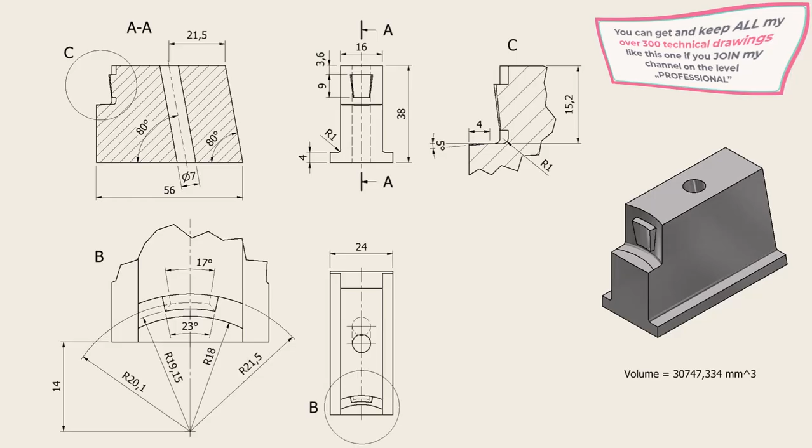Hi my friends, today we model this part. It seems to be simple, but it is not simple at all. These faces are sloped and curved.

The drawing is here and the name is spin piece. You have two details, B and C, to understand each feature and dimension.

We start by creating this contour with an extrude of 56. You see dimensions 38, 16, 4 and 24.

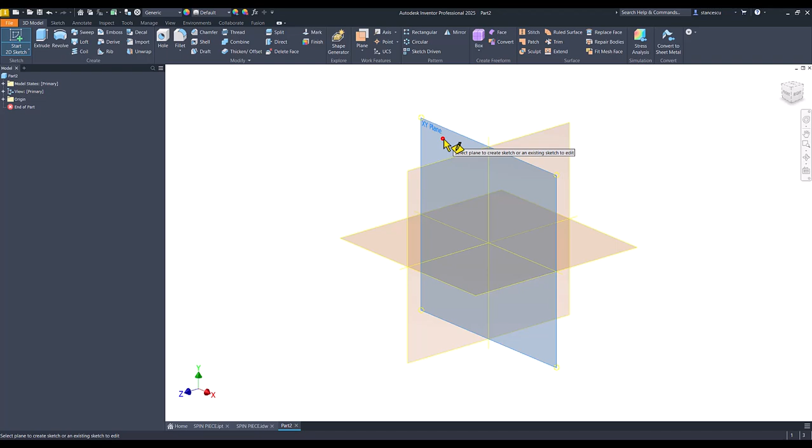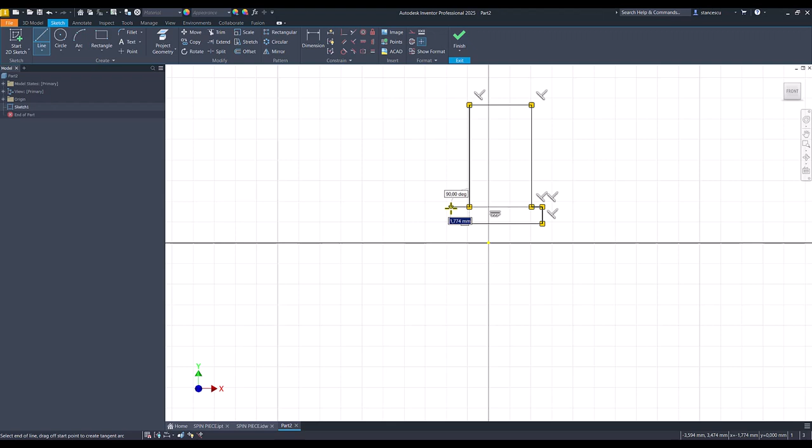Let's start. Standard millimeters IPT, new sketch, XY plane, and we draw lines. I go at this level, then here, and close, but vertical, of course, this line. We place the midpoint of the base

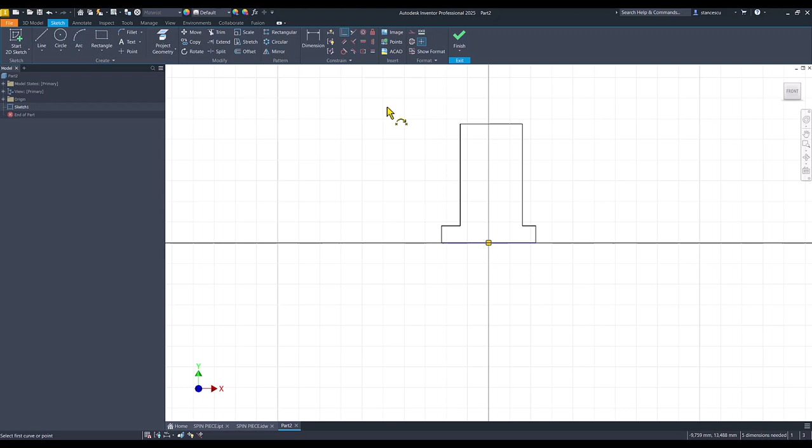on the center point and we apply equal to these two small lines. Why? Because we want to have symmetry here without any other entities placed here.

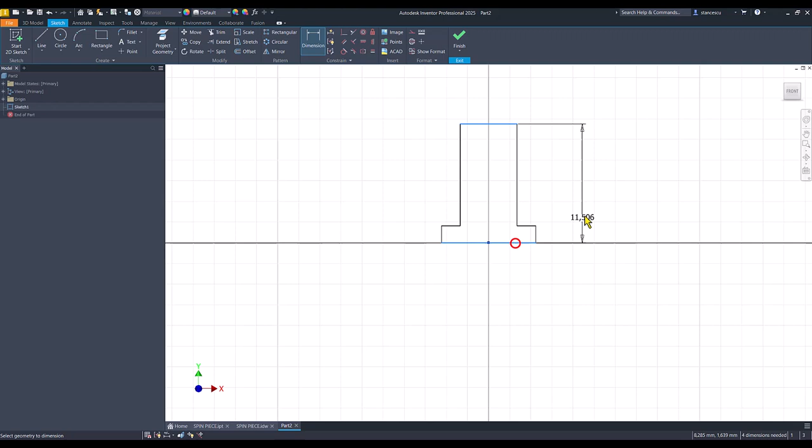Dimension, this is 38. Everything is scaled. This is 16, 24, and the last dimension is 4 millimeters here.

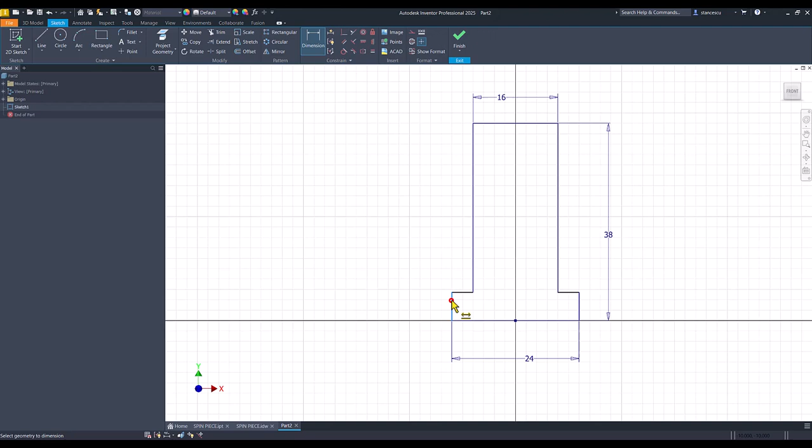Finish sketch, extrude to the other direction of 56.

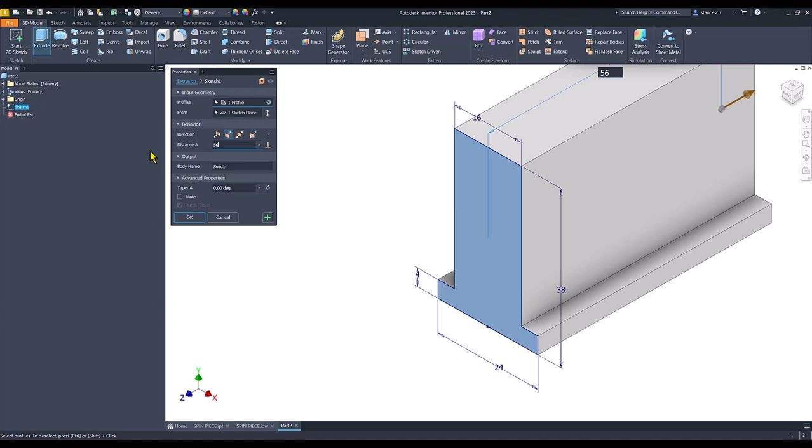Then we cut this end of the part 80 degrees from 56.

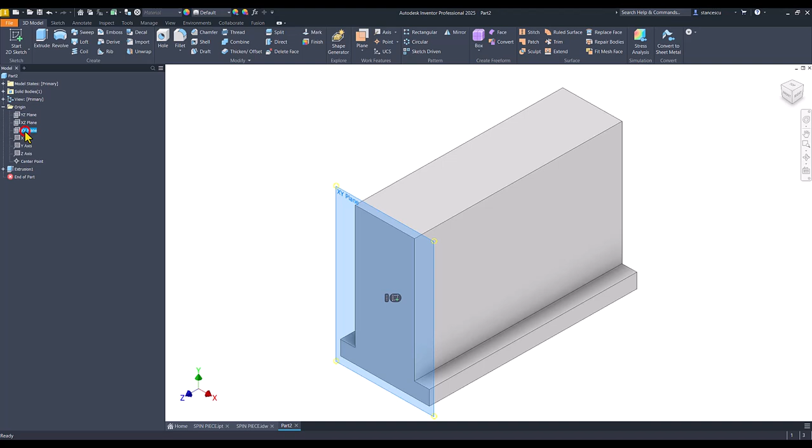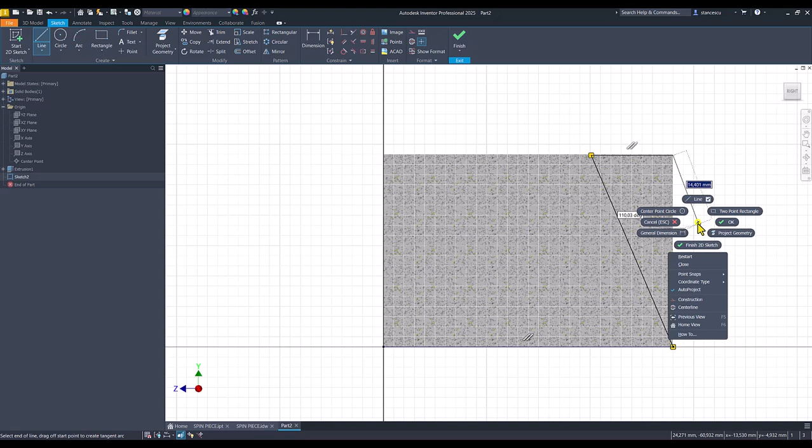We select the sketch XY, not XY, YZ, and F7. We draw a line from this corner up here, then to the end, then close. The angle is 80.

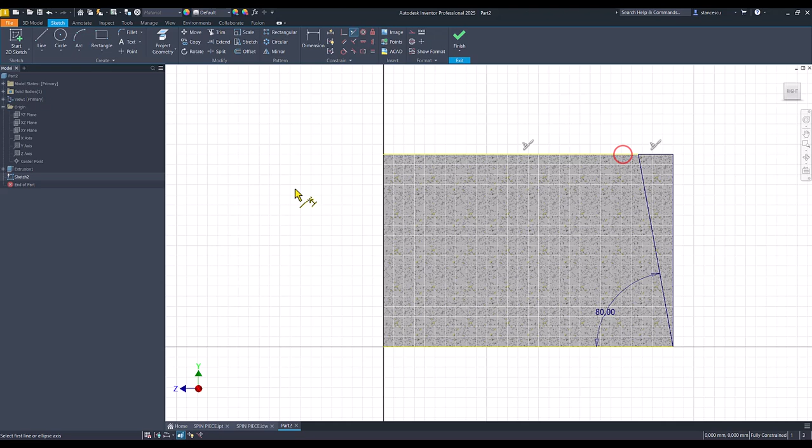I must project this line and make collinear these two lines. Finish sketch, extrude, symmetrical, cut all the way.

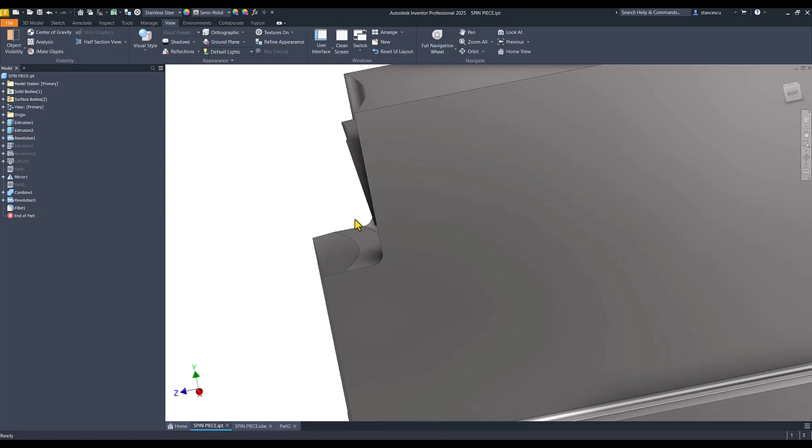Then we apply this cut, you see, around here and with another face here. Dimensions are here, you see, 21 and 18 are the important dimensions.

The center of these arcs is at 14. Dimensions, radius 18, radius 21.5. This is 4 millimeters and this is 5 degrees. Let's apply this.

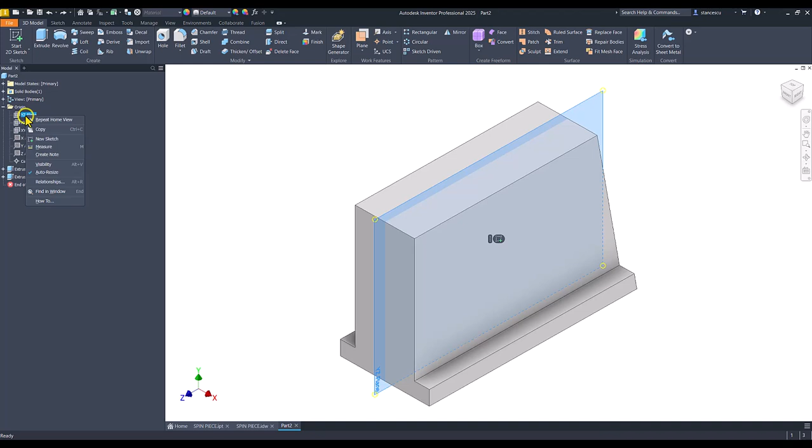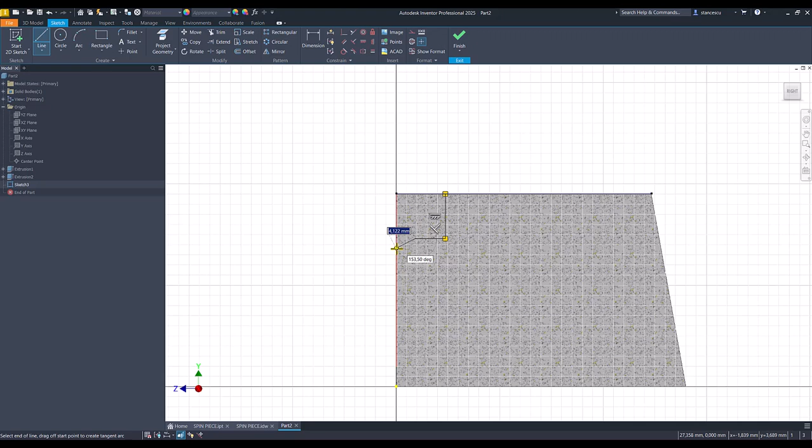We use the plane YZ again for a new sketch. F7, and we focus on this corner. Line, down, left, and sloped. We connect these 2 points and also this.

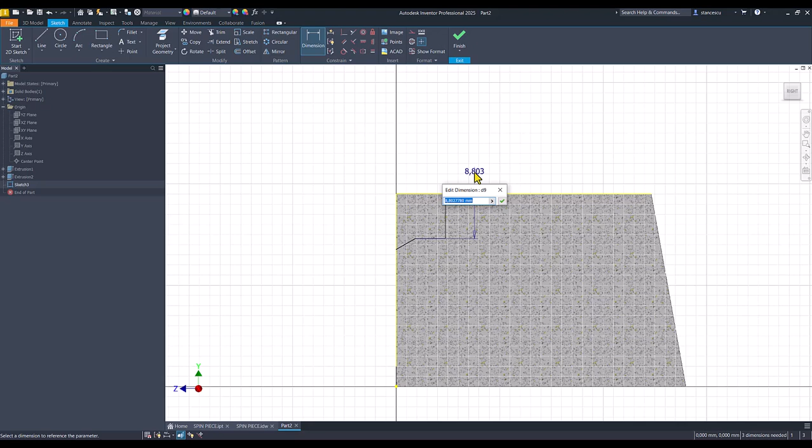We place vertical dimensions. This is 15.2. The angle must be oriented down 5 degrees.

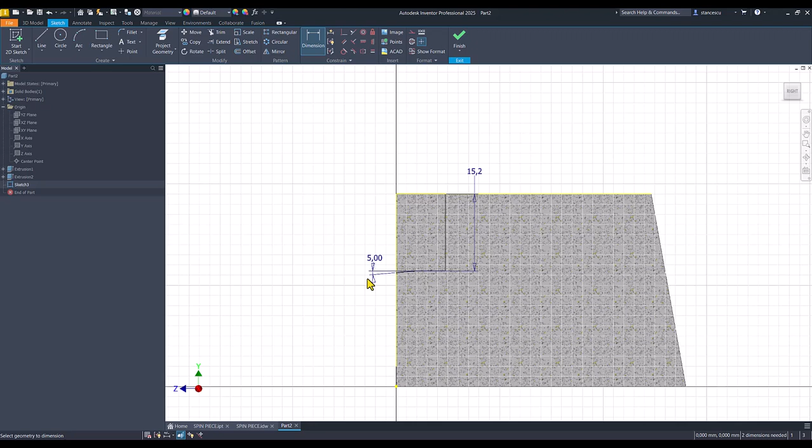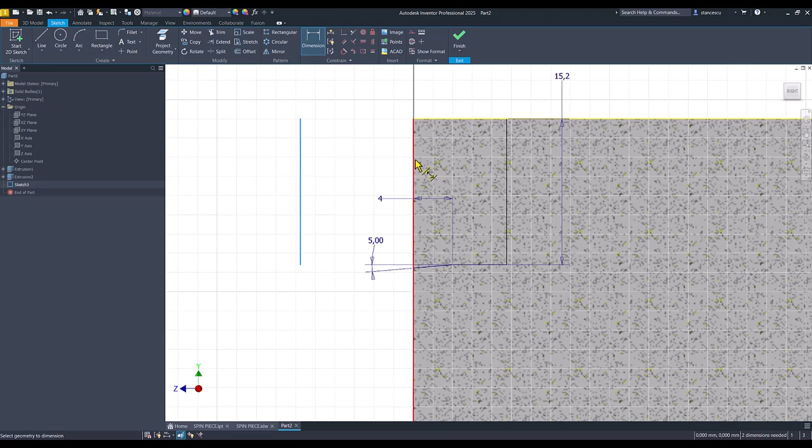This distance is 4 millimeters, and we draw an axis here. I like to place constraints for the ends because we have to have here a fully constrained sketch. This line is placed at 14 millimeters from the front,

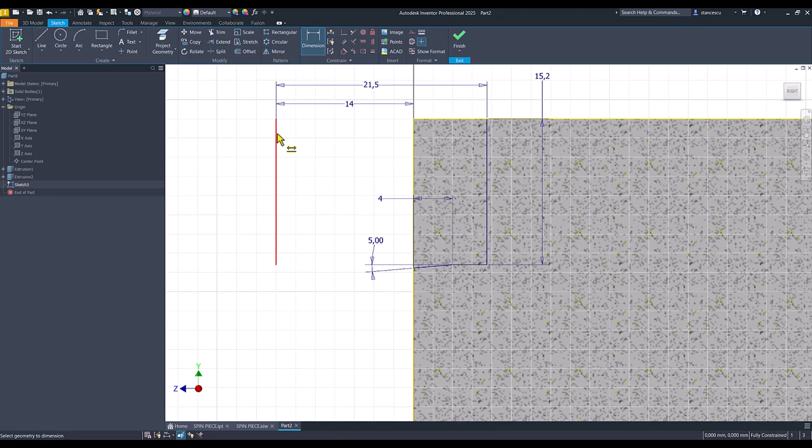and this is a radius of 21.5. This is an axis, but I don't make it as an axis or center line. Fully constrained sketch.

Revolve. What is the axis? Asks Inventor. This is the axis. Cut. OK.

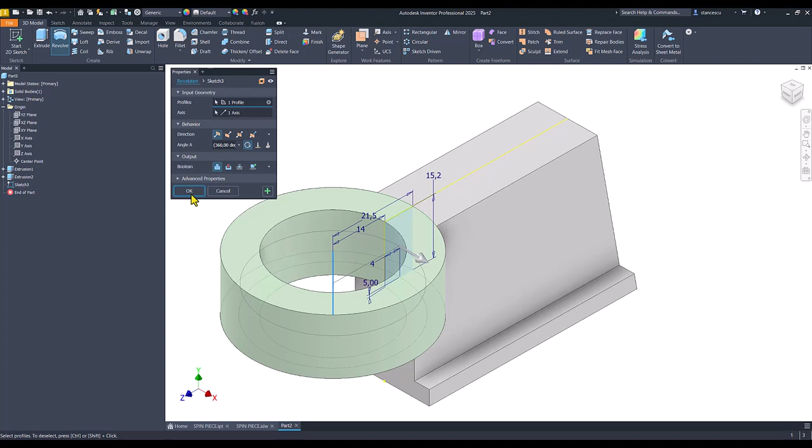Next is the spin. I call this as a spin. Dimensions are 3.6 and 9. I have to use a special procedure now,

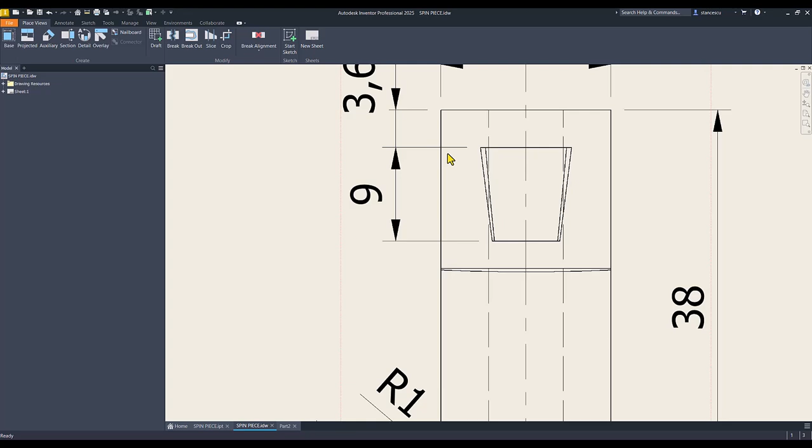so I create a rectangle here, a rectangle as you can see, and then other operations.

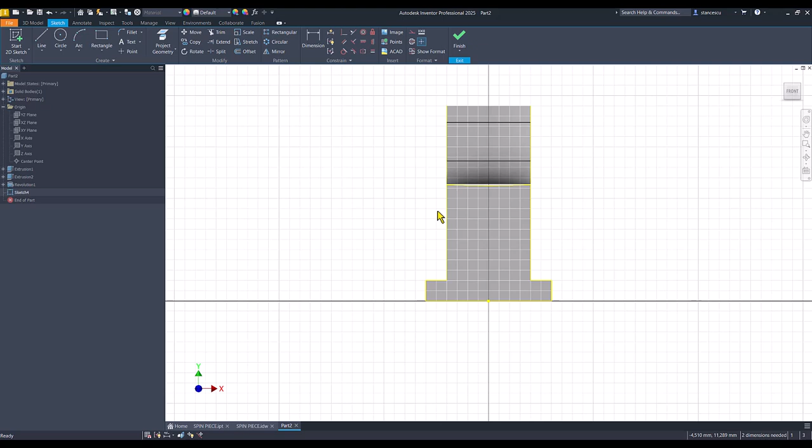I use this face for a new sketch, then I project these 2 lines and I draw a rectangle. Yes, we have to place 2 dimensions. This is 3.6 and this is 9.

Finish sketch, extrude. There are more than one area, yes? This is why Inventor waits for us to select profiles. I select this to the part, to this face,

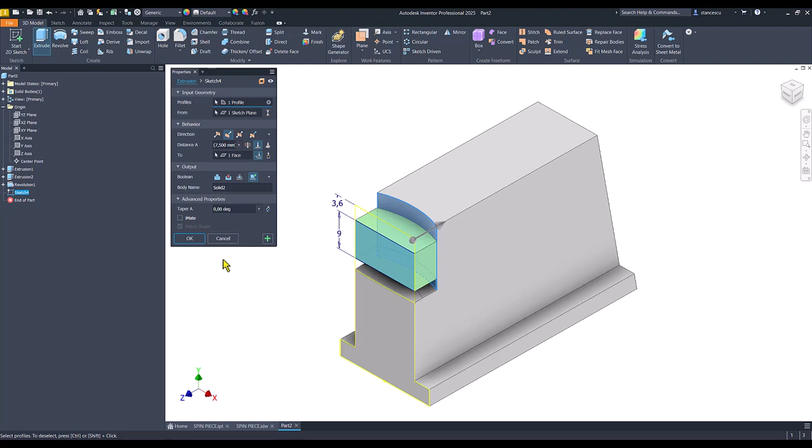the other direction, and I don't select join, I don't select cut, neither intersect, but new solid. Okay, what is this new solid? Now you have 2 objects there.

I apply the property for the last one, red for you to understand this. If I hide this

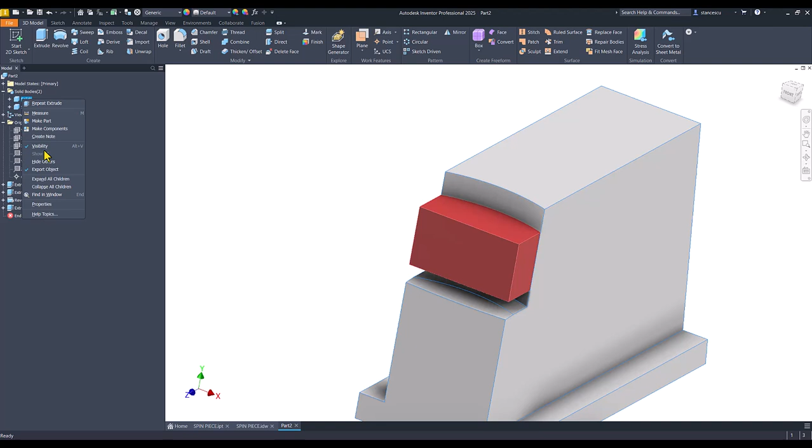part, you see we have a circular, cylindrical face there, but we don't hide the rest of the part, the main body, you can say.

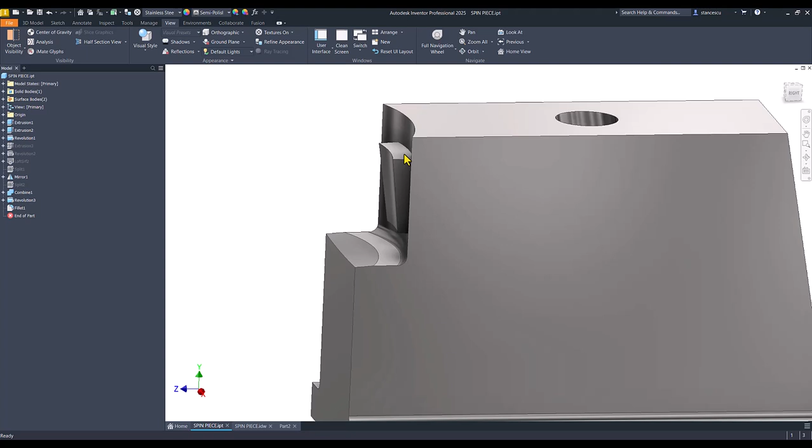Now you see that this face is not cylindrical but sloped. Oh,

what to do? We create a new sketch here. Dimensions are 19.15 and 20.1. You see,

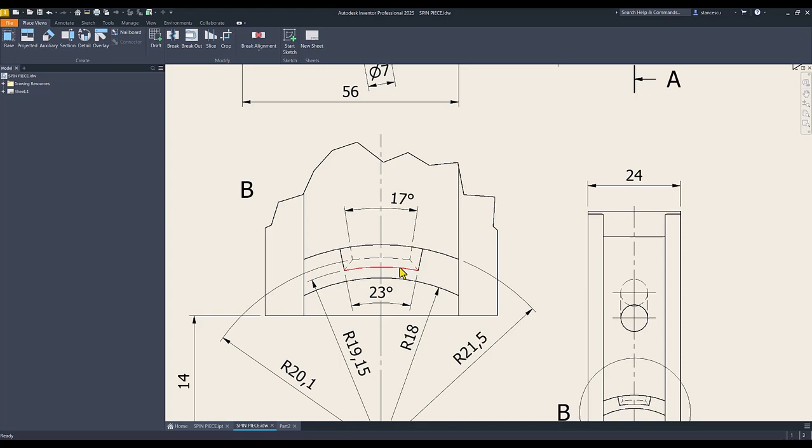this is an arc, this, and the other is this. They are placed at the ends of the last feature, the one that is another solid.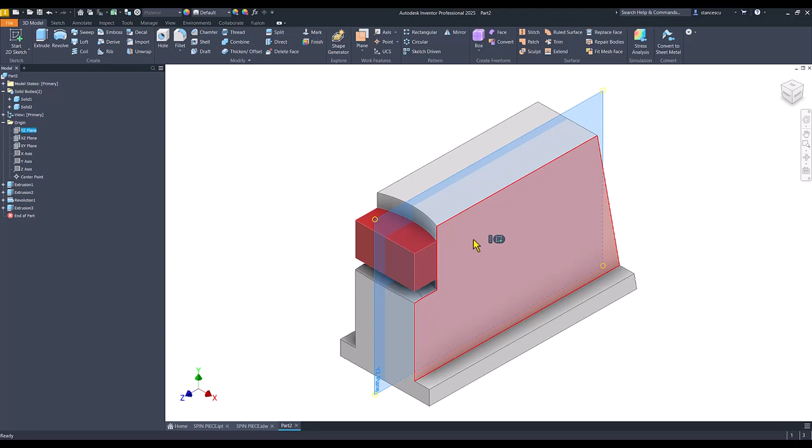Okay, the same plane for a new sketch, F7, and we make visible the last revolution, this one, visibility.

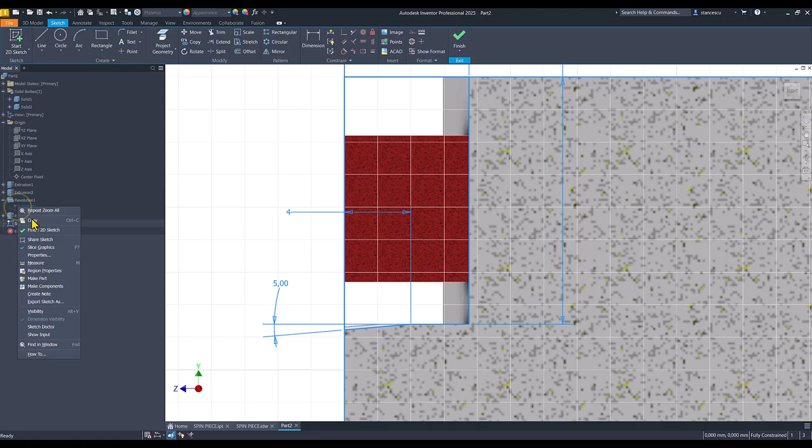Why? Because I need this axis. I don't want to create again a new axis. We have it here. I project this line in the new sketch and I hide the old sketch.

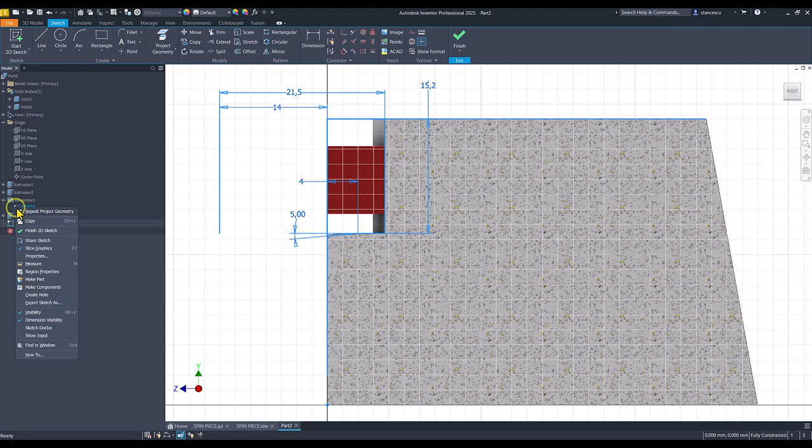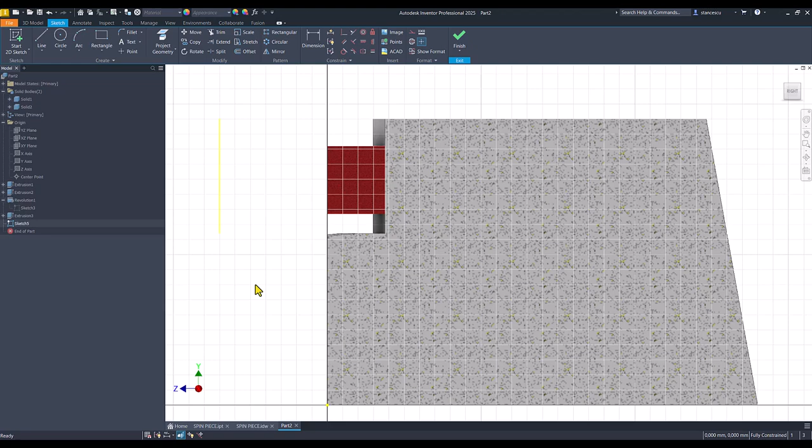Yes, now we have here the green, the yellow line. If you like, I can apply in sequence Alt F(I). You know this procedure. I use it many times, and now we see better what is here.

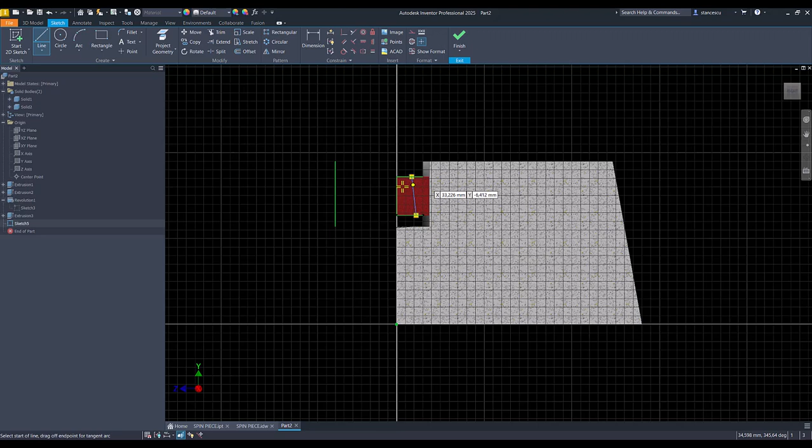Good. I project also this line, and I draw another line between these two sides. The two dimensions are

radii from this point to this is the smaller distance, 19.15, and this is the greater dimension of radius of 20.1.

Now you see this is the line. We have an area here, very interesting, to apply revolve. Oh, but it is not closed.

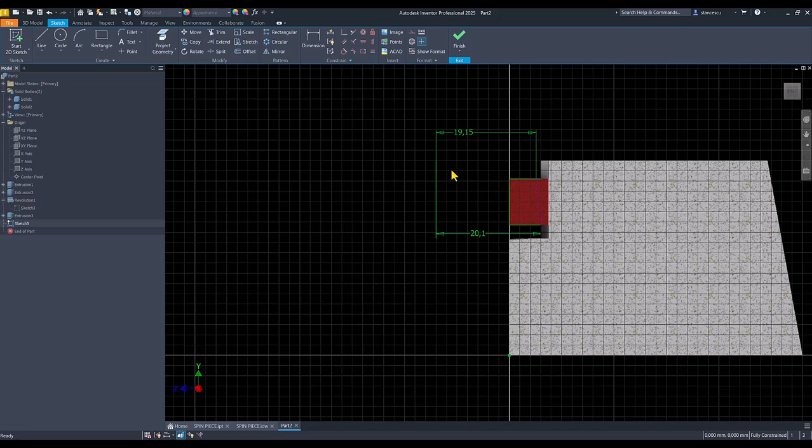Once again, double click F7, and we have to connect these 2 points and these 2 points. Yes. Now we can apply revolve.

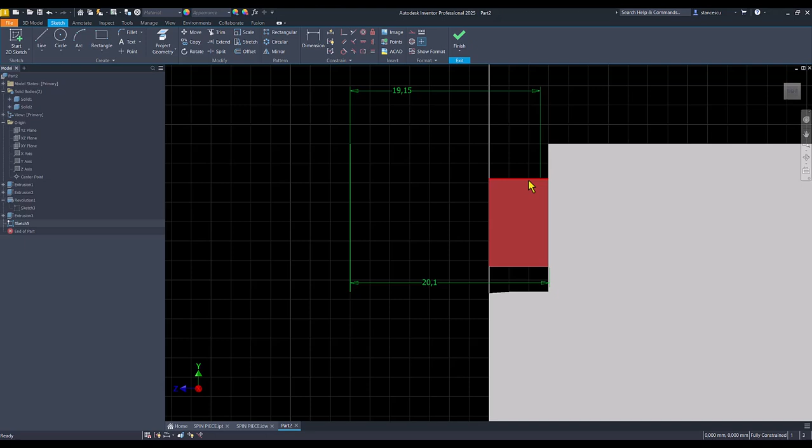No, this is not selectable. This is fully constrained sketch. This line exists. Also this, also this, also this. Oh, here is a problem.

You see, this must be longer. I apply extend of this line to here, but there is a constraint here. I select and I eliminate that constraint because I want to place this in connection with this. I make something else.

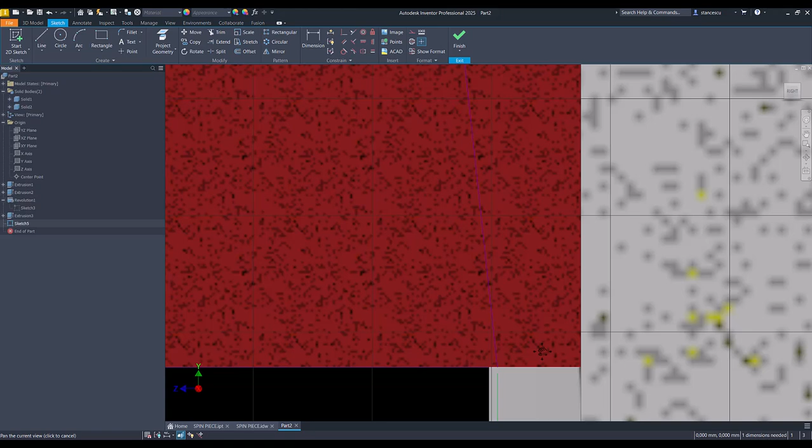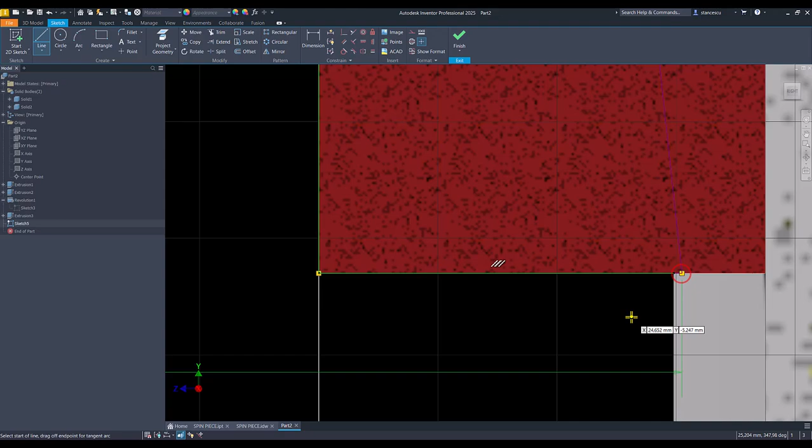I delete this line and I draw a nice new line between these 2 points. I made a mistake by selecting this instead of this. Why? Because I am in a hurry all the time. I don't want to have long tutorials, my friends.

Revolve. You see the profile is already selected and we have to select the axis. This is the axis.

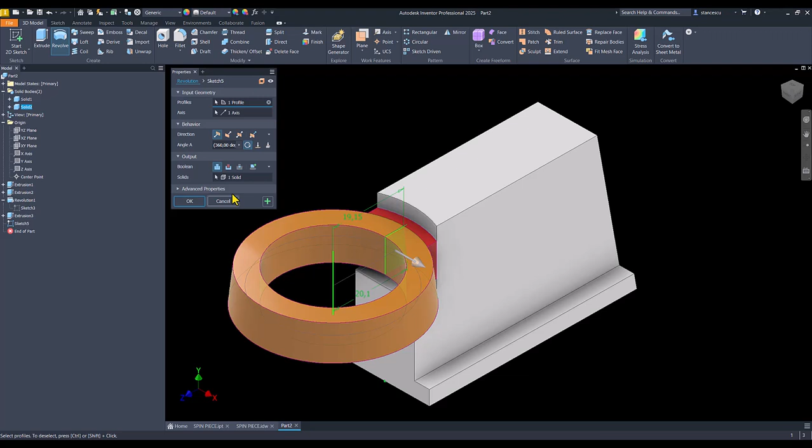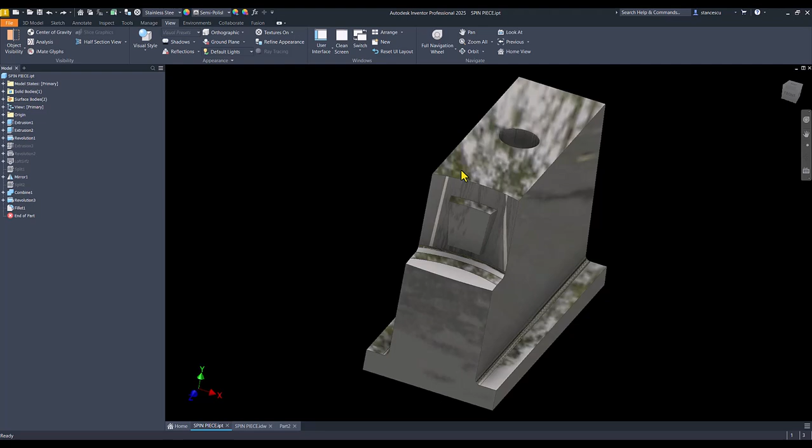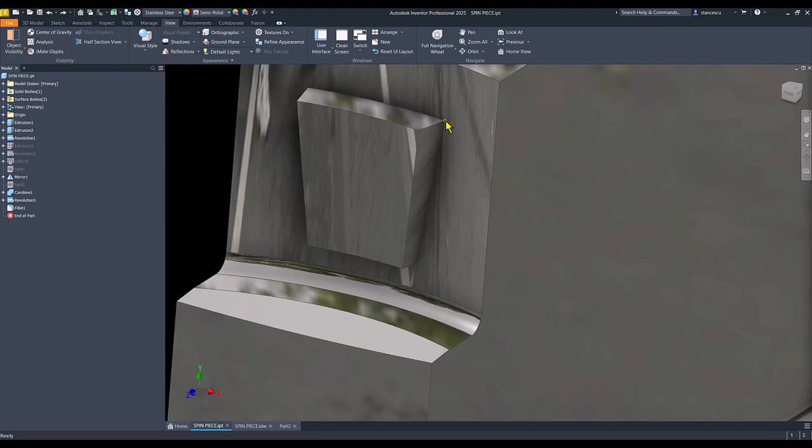Cut is the solution. Now we have to apply to create this face, and this is not a simple face. You see this is a reflection automatically - oh, and this is me. This face, my friends, is not a plane face because this line is at an angle and this one is at another angle.

So we have to take a look at the drawing to see what happens here. I have to draw this line at an angle of 23 by using a line from this point to inside this volume, not to this contour - you will see why I have to do this. The other line is at another level: one is at this level and the other is at this level. The second one is at 17.

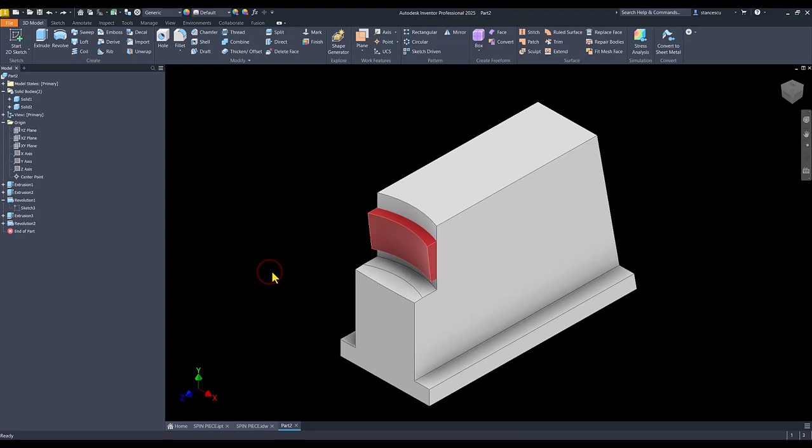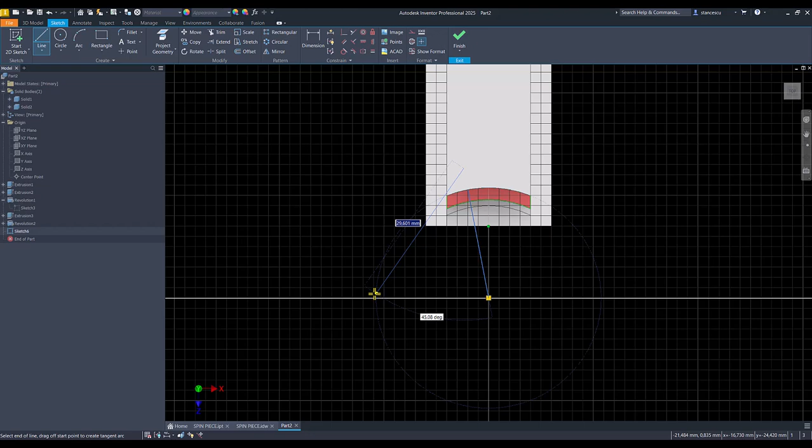Very interesting - this means we create a new sketch on this face. This is a plane surface, and we have the center here to draw a line somewhere inside the volume. F7 to see the line. We add a dimension inside here of 1 millimeter.

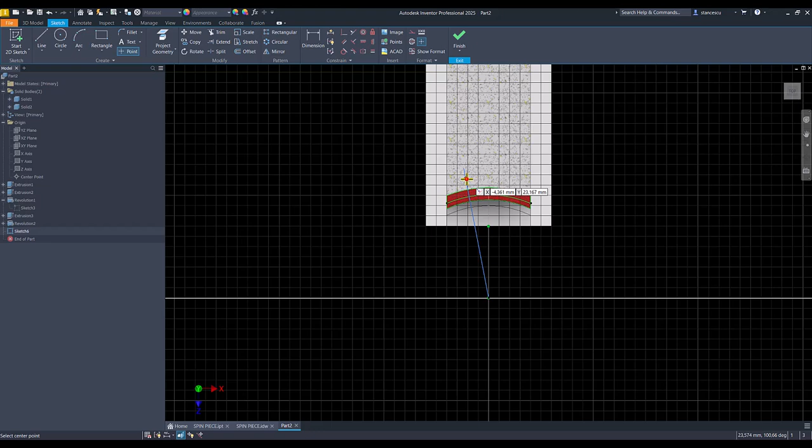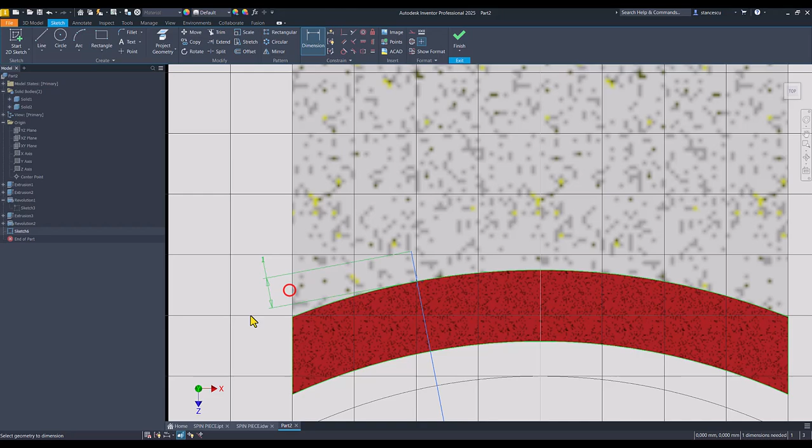This is enough. I place here a point on the line, and I place this point also on this projection. The point is here. Then I apply a dimension between these 2 points to exceed the line outside - 1 millimeter is enough. Now I apply the angle between the line and this face. This must be 23 divided by 2. Finish sketch.

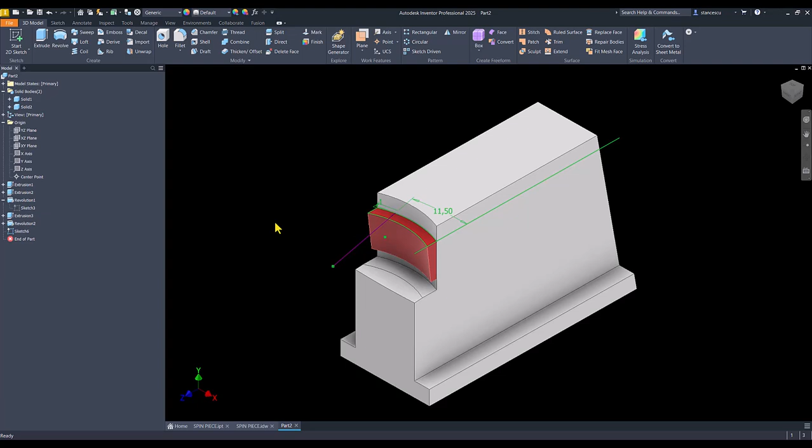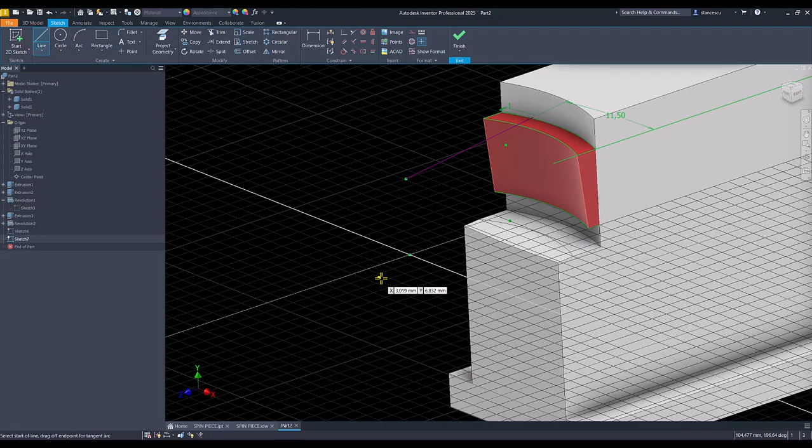Another construction is placed on this face. New sketch, I turn this. As you can see, everything we do is in this plane. We draw another line in that plane with the grid, also inside the main body. Now I apply F7 - we don't see the other line, but only this one. I place again a point on the line. I make coincident that point with this line, and I apply a dimension between the point and this end.

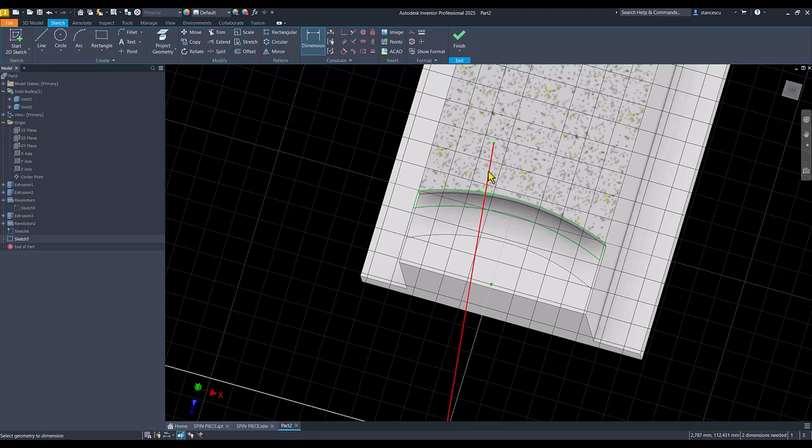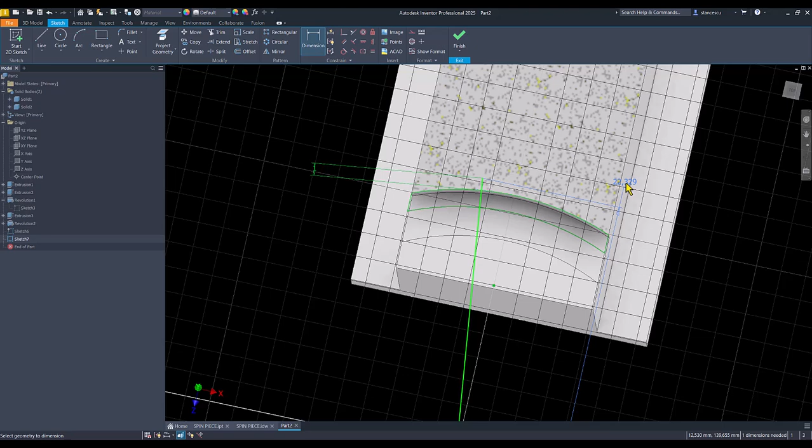I have to obtain this aligned dimension, and the distance is also 1 millimeter. The angle is measured here - the value is 17 divided by 2. Finish sketch.

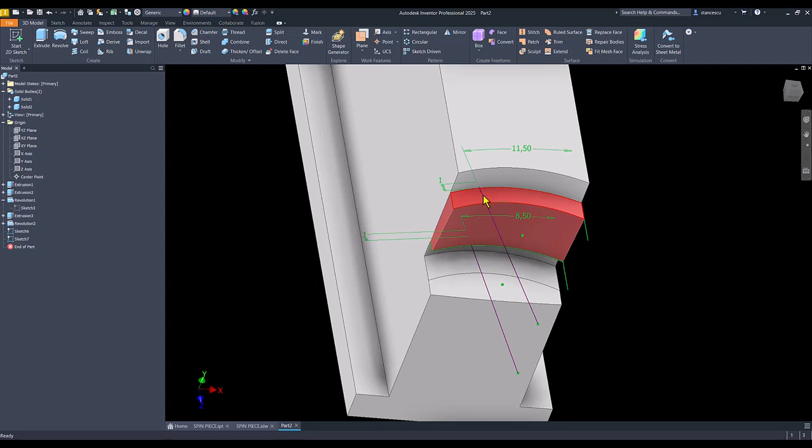Now we have two lines starting from the same vertical point and going inside the body. Very interesting, but what to do? You must understand that we work now on this red body and we do nothing with this.

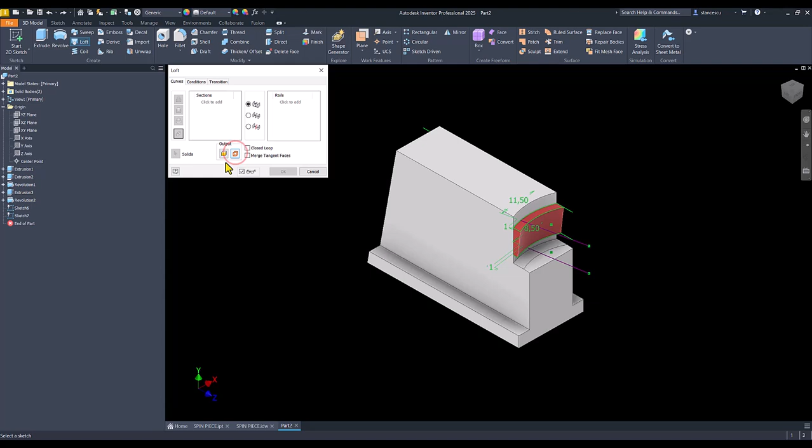The answer for what to do is we apply loft - loft, not a solid. We don't create a solid, we create a surface. I select this, then I select this line and this line. Now I create a face, a surface, but it is not a plane surface - it is a curved surface.

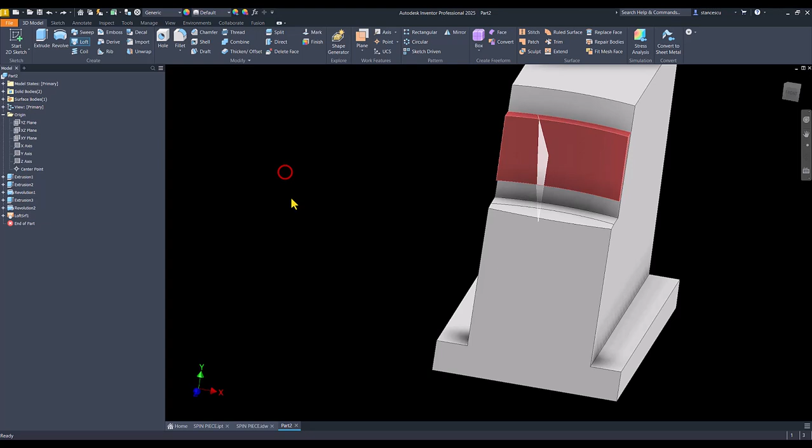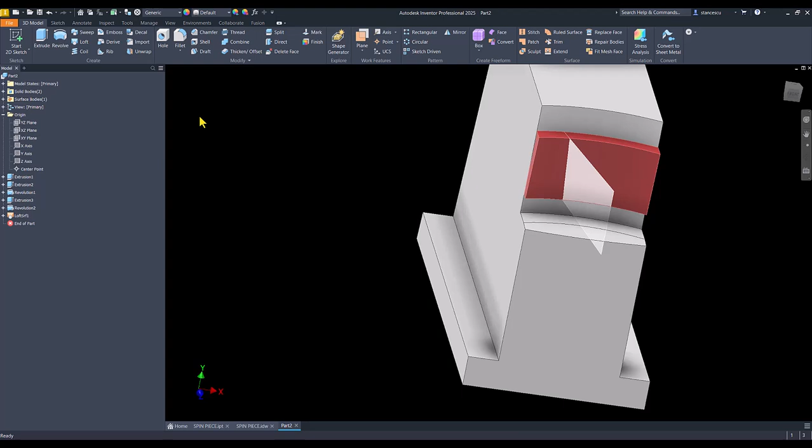I use this to cut this portion of the body - we don't make anything to the main body. What is the tool we use for this? Split is the tool. I select that tool and I select this solution, but Inventor waits for me to select the solid for applying the split. I select this, not this. Yes, the direction is this, and I agree.

Okay, very good, now the other end. I apply mirror of this surface - this is what we mirror, and this is the plane. Now again split. We select the tool, this, not the other. We select the solid, red is the solid, and we apply this or this - this is what we use.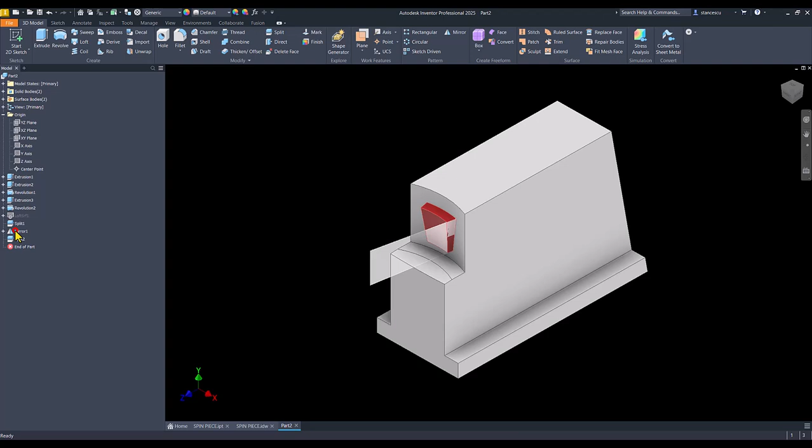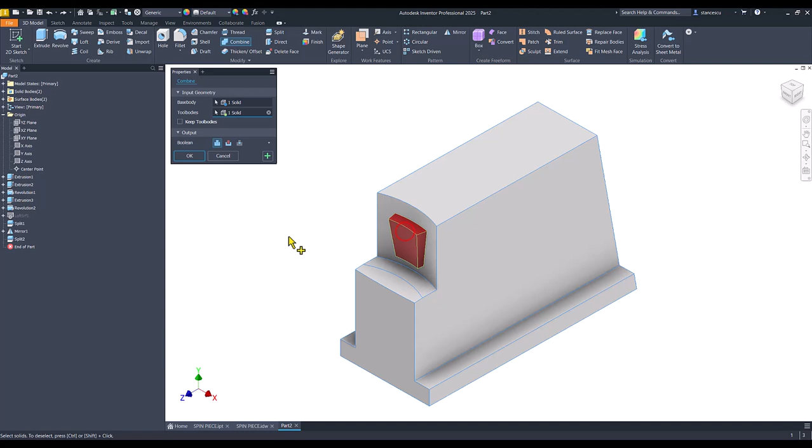Now I go to split and apply visibility. The other split is this one, and I hide all surfaces. We apply the tool combine - we select the base body, the main body, then the tool body, which is this red one. Okay, there is only one object now - you see, solid 1, not solid 1 and solid 2.

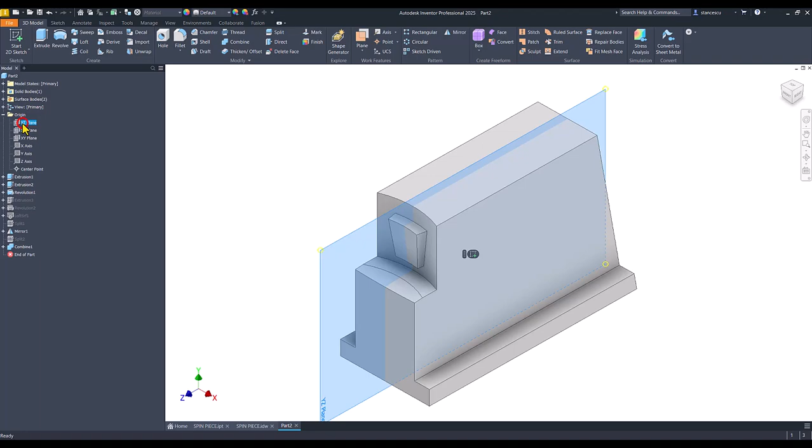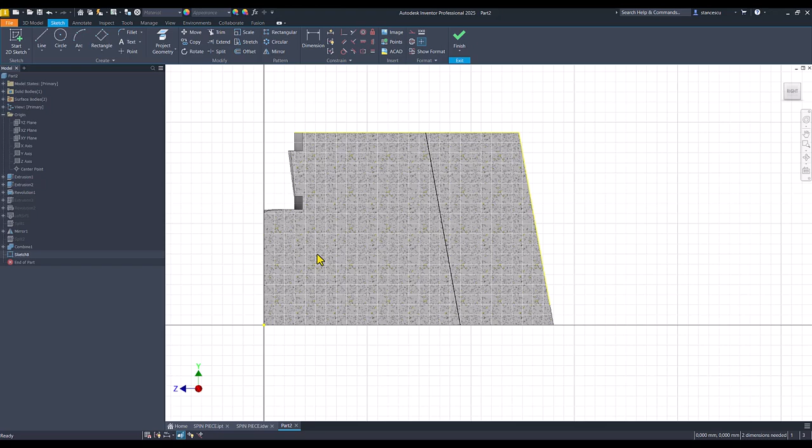Next is this hole, diameter of 7 and distance up of 21.5. The angle is the same as with this one. Good, we select this plane for a new sketch, F7. We draw a sloped line. I hover on this to obtain the parallel - they are parallel, you can see this, yes? The distance is 21.5.

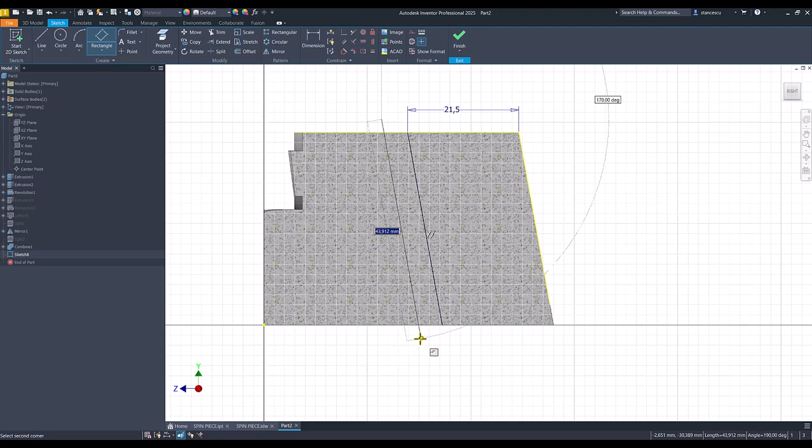Now we create a rectangle in 3 points. I hover here to find the parallel, then I go to here. I make coincident these two. This is an axis, not this, this - a center line. Then we want to have both these lines outside the object.

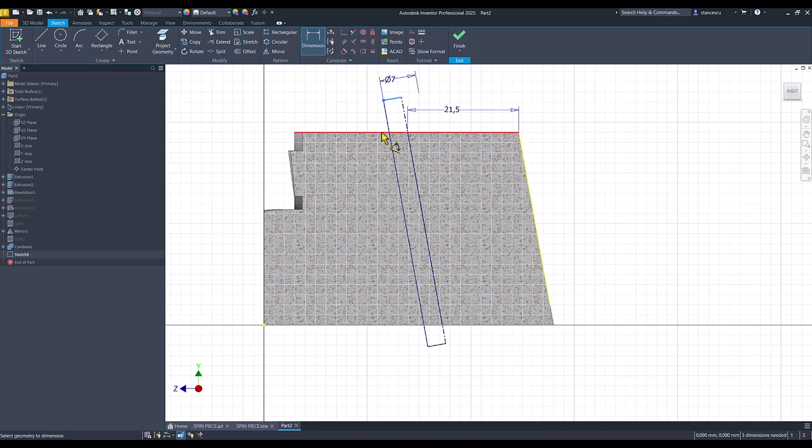The diameter is 7. I use this dimension to place distances - the distance between this point and this point, the distance between this point and this line is half of this. I don't care what that dimension is. When somebody changes the dimension, we also have a distance there. Yes, you understand this? Yes professor, I understand - is the answer, the correct answer.

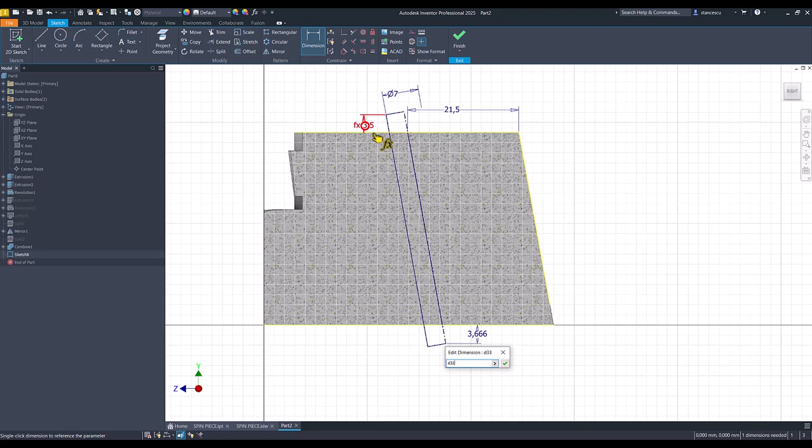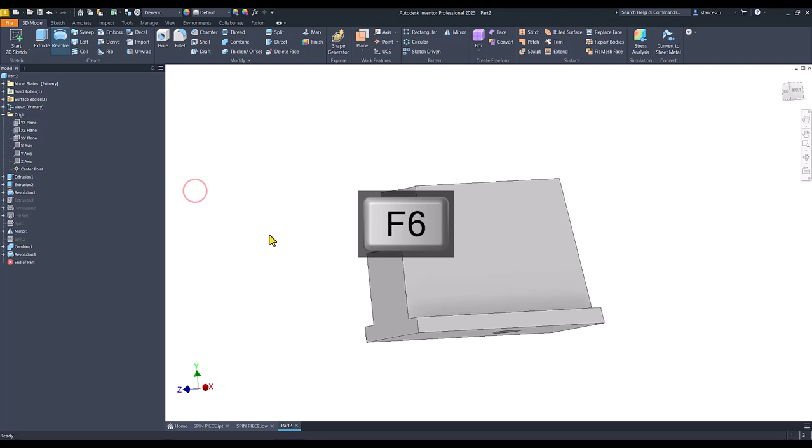Now I copy this, yes, good. Finish sketch, revolve this - the axis is unique, and we have a hole from outside to outside. Okay, we see here radius 1,

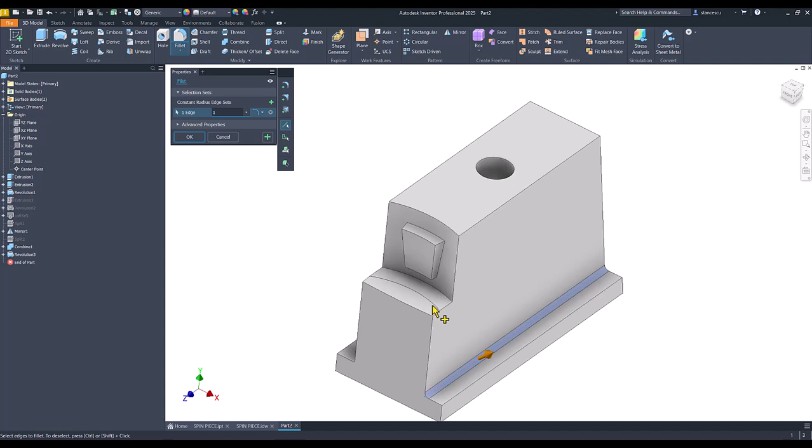and radius 1 here. Let's apply these radii, these fillets. This is 1, not 2. This is also 1, and this is also 1.

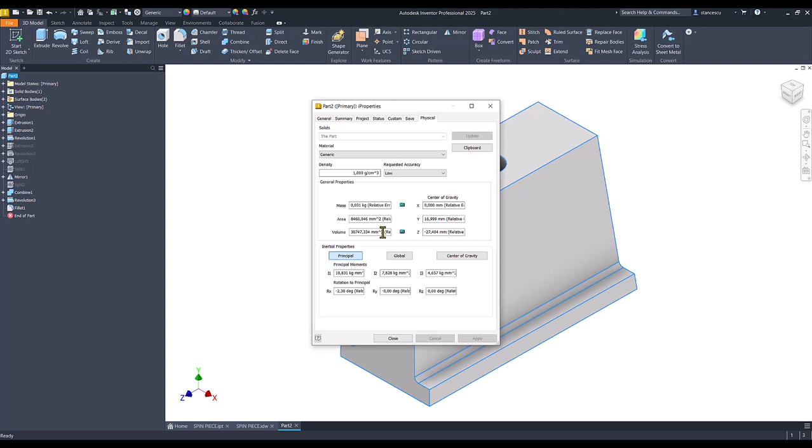Okay, now I suppose I finished the part. Let's see what is the volume. I go to properties, physical, update, copy, close, drawing, double click, and the new value is the same. I apply cancel because I don't change the value.

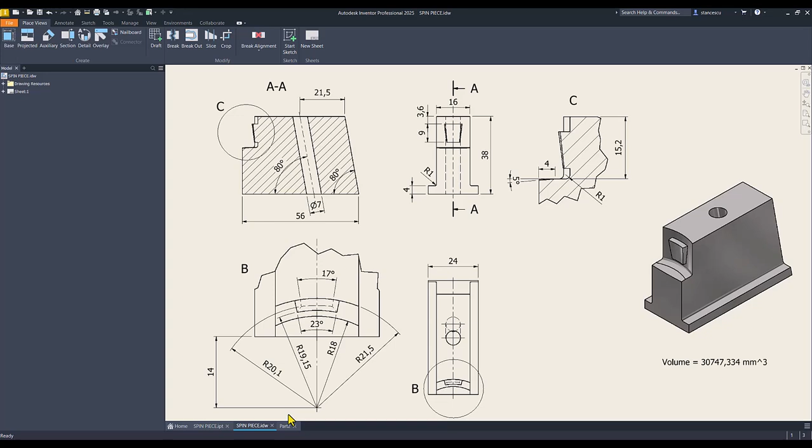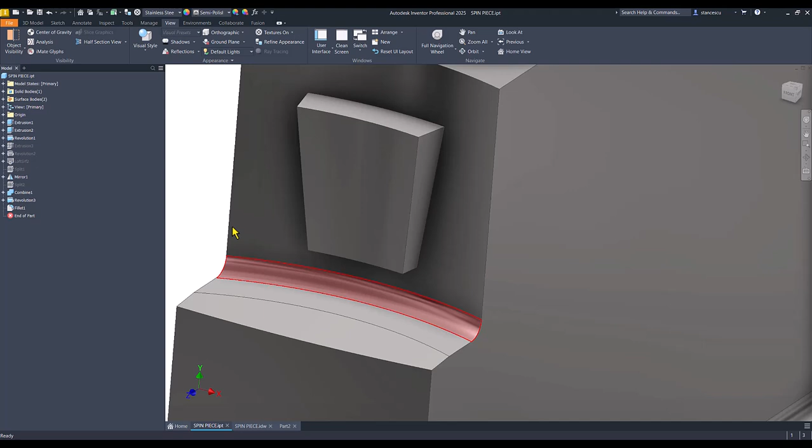We use the material stainless steel. We apply another view, another light, default light, and now we see the same object if I apply F6. Yes, no differences between them.